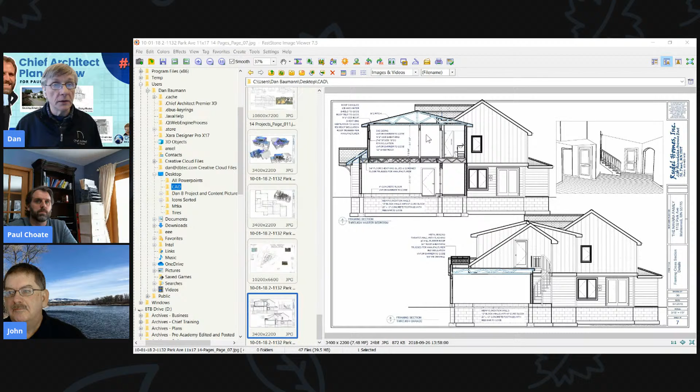I wanted to show you a little bit about some of the things we'll be covering in this course. Over the years I've developed a practice in Chief Architect, and Paul has adopted a lot of this into his plans. That's why I was really impressed with what he had done with nice details and doing the 3D framing in his project—taking full advantage of the Chief Architect software to draw details and show the framing for the projects you're going to do. I understand a lot of people may not want to do that, they may not want to show the framing, they'll just rely on the construction details. But Chief is really, really good at doing the framing after you've done a good model.

Up until now, we've really focused heavily on doing good models in the program, trying to get the right floors in, the right walls, the right ceilings, everything—trying to get all that stuff just right in our plans and have it as accurate as possible. So if we're doing that, why not show the 3D framing?

Because the framing doesn't take that long to put in. Paul, on your project, did it take that long to put the framing in once you had the model in place? We'll talk about that in a second.

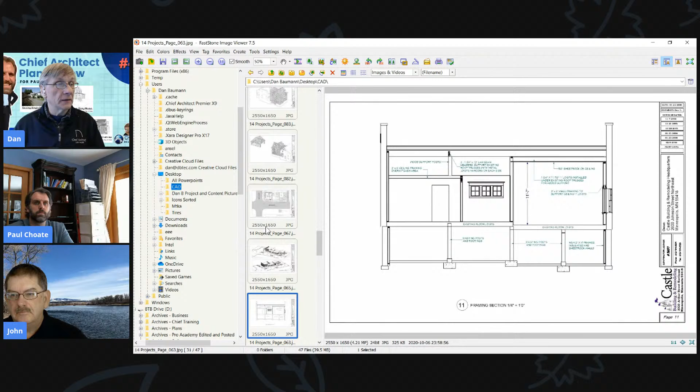I actually did this plan back in 2002, so I've been doing this kind of thing for a long time, showing that kind of information. Here we've got one showing the streets and everything in the plan, and even bringing that to the 3D views so you can really see what's going on.

So John, you've been around me long enough, and I know you do a lot of this yourself. You got any comments about the course? From what I've seen from people that show me stuff, Chief can do anything that AutoCAD can do, when it comes to residential construction. In our world, absolutely.

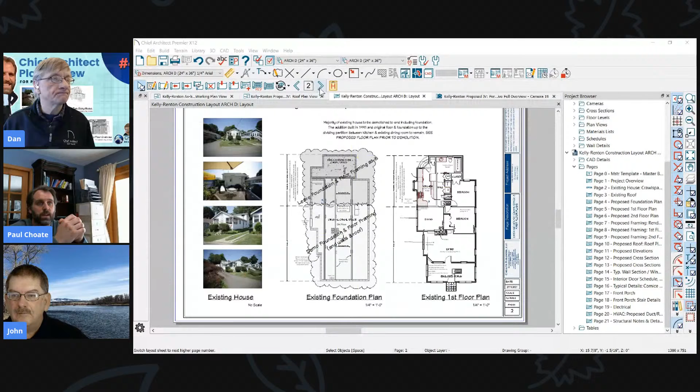So we're just going to tear half of the house down and rebuild it. So then I had to do my as-built, draw it up as best I could with the existing. It was one of those houses where none of the walls were standard dimensions. Some of them were 1.5 inches thick, just 2x4s with pieces of plywood put on.

The footings and the pillars and whatnot in the basement, there's a ton of them. When I went to do the as-built, I just kind of put layouts approximate of those footings, because I know we're going to tear half of it out. The existing structure has the whole first floor as an oak floor, over 2x6 framing with no subfloor, and we got to tie into that.

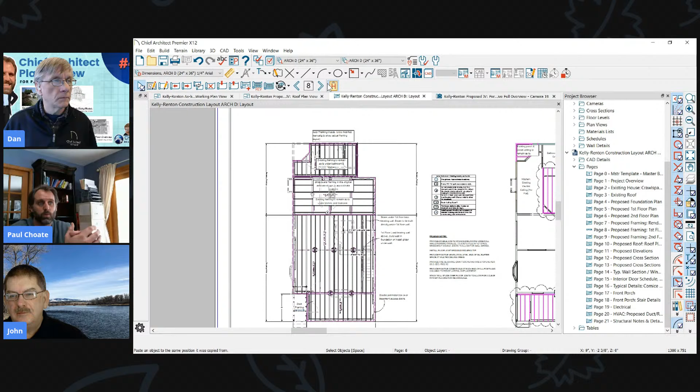The 1991 addition that was put on the back of the house—after that is where the original house begins, and we're going to keep about 10 feet of that original house. So if you look at my elevation views, the cross sections, you see the different heights of the basement floor, what we're going to have. It was a challenge for me to draw this, to get a good rendering or a good concept of what it's going to be.

Yeah, definitely a challenging project. I mean, it's not a huge project, but yeah, you got some things going on here. John, you were asking something? Nope. Oh, okay. So okay, cool.

So there's a couple of things I want to do here with you. One, you're up to 21 pages in your plan, and so you've got a lot of detail. You've obviously put a ton of effort into this plan. You started this in July, it looks like.

Is that correct? Yeah, we started—I worked on it for probably 2 months, and then we took a break because we knew we weren't going to be building it in the fall. We were going to have to wait until the spring. So once the concepts were complete, we just kind of took a break, and then I started working on them about a month ago to convert them over to the working drawings.

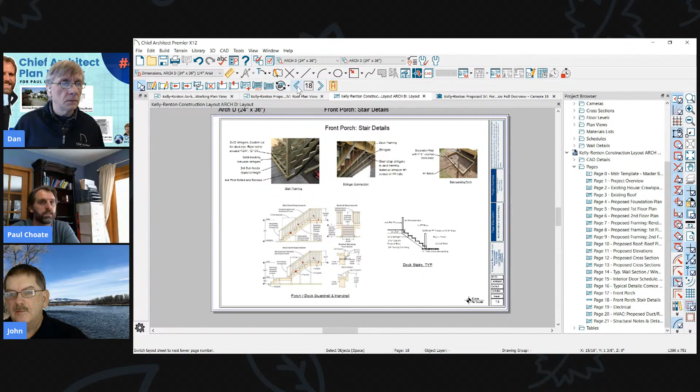Okay, cool. So, young couple, family, got kids and stuff? No, they're in their 60s. Oh, older couple. Okay, they just always wanted to have a bigger house, and so that's what they want to do.

Yeah, all right, cool. So I was actually looking—you had sent me a backup, and the backup has all the... so when you're in Chief Architect and you want to send a file to someone, the best way to do that is to go to the layout page, then go to file, and go to backup entire plan. What that does is anything that's on the layout, all of the plans, any pictures, any PDFs, anything that's in the plan, can be sent as a zip archive that will be put into a folder.

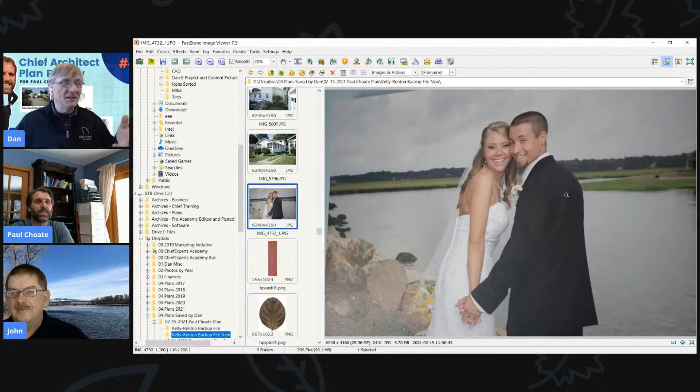And here you can see we got all the materials from the actual 3D house. The reason I mentioned, I asked if it was a young couple, is because I saw a picture here of a young couple—I thought, oh, maybe that's the people building. That's from another project, and I don't know—I took that and put it in a frame and put it on their wall when I drew it.

Yeah, and that's kind of fun. I'll do that too with clients. Yeah, if you can find—backup, save as. So yeah.

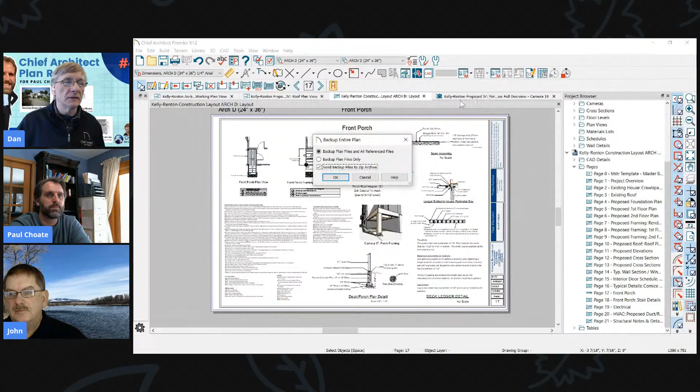And so when someone opens that plan on a different computer, they won't get those error messages that something's missing. So that's the best way to back up a plan and send it to someone.

So let's go to page 1 and start working our way through the plan. All I'm going to do is click on the page number here, type in which page I want to go to, and that'll jump me to page 1. I could also just double click on the item in the project browser where I'm in the pages for that layout. There's really a lot of ways to navigate through your project.

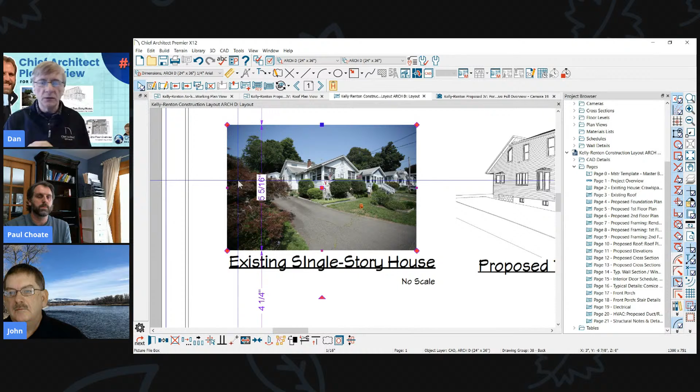I really like how you took advantage of the use of photos in your plan. You can put those on the layout, in your CAD detail window, or on your floor plan. There's all sorts of places you can store pictures in your plans.

Just an FYI about those: when you place pictures in your project, if you're going to work on this on different computers—a laptop, a desktop, maybe someone else in your company is working on it—when you put photos in your plan on a layout, make sure you open them and hit save in plan. Did I not save? Not on this one, it didn't. What would that be? You open it up on one computer, then you do it on another, and it's not there. Right, that's what happens.

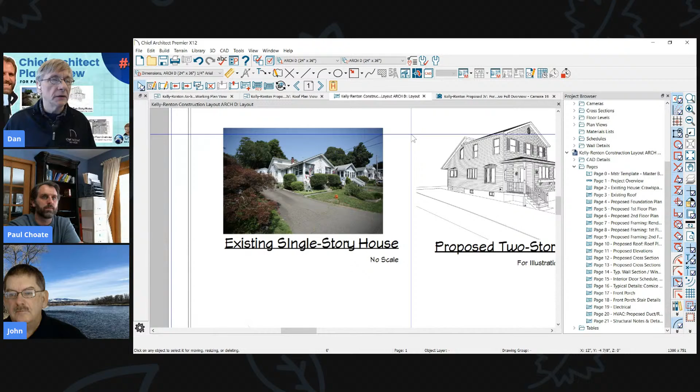Save in plan, okay. I see it because you did the full backup and it included those in that folder. But again, if you have any issues with those, that's what you've got to do.

So you've done a nice job, you've got some nice overviews here. Looks like you've done some nice renderings, got the shadows turned on. First and second floor overview. I like your little illustration, not to scale—that's a really good little deal there.

Now it looks like you're using one of my old templates, and you've customized it for yourself. So you're using the automatic page titling—whatever you name this, it's going to show up here, and it's also going to show up on the schedule, the page layout, the page schedule. So that really makes it easy.

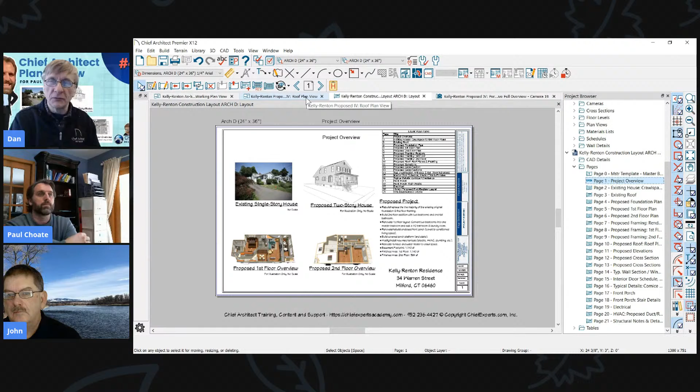So those of you using Chief's layout function, make sure that when you're adding things like that—again, part of this is we're reviewing your plan, but I'm also here to teach people about some of these functions in the program. So bear with me as I go through both of these types of things.

And if I get too deep into it, John, just tell me to shut up. I will. Or be quiet, you just say it nicely. Move on, Dan. Yeah, move on. There we go, it's like, get out of it.

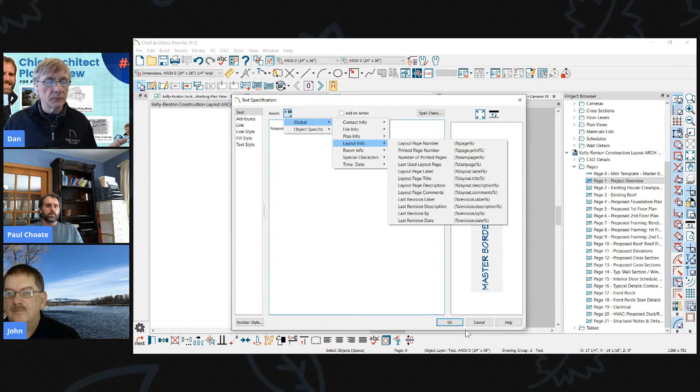Now, Paul, it looks like you might actually be using the auto page numbering, or are you not? So how are you doing your page numbering? Go to page 0, the full page. Okay, so you're using the layout page macro, which you can also do. In my new template, it has this all in it. And this works okay if you're going to rearrange the pages—they'll still update.

What doesn't work is I have no way to automatically label my callouts on the floor plan. So instead of using the page number, what we want to use is a macro called the layout page label.

It's the label. They could almost name this layout page number, because that's really almost all it's used for. When we use the layout page label, when you have callouts on your floor plan—let me find a callout, not a note.

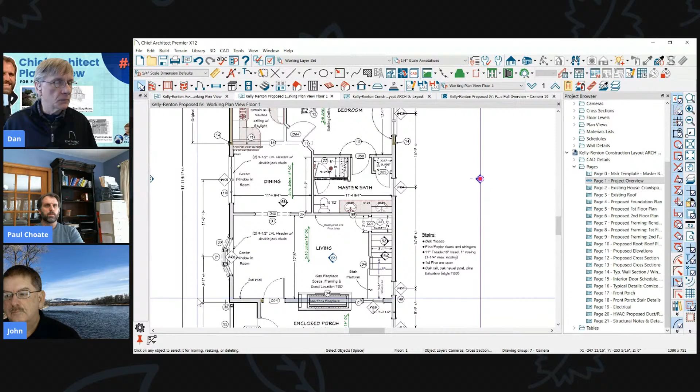Let's go back to your working plan. Here's a callout. If you want the page number to show up in there, under page display, whatever you have in that box where it says layout page, that first cell, it'll automatically put the page number in your callout. So when you rearrange your pages, they'll always stay up to date, and your callouts will always have the right page number on them.

I won't get any deeper into that right now, that's something we can talk about another time. Back to your plan. The step you're missing is that you have to watch your callouts and always change the page numbers manually, which is a real pain. So we want that to be automatic.

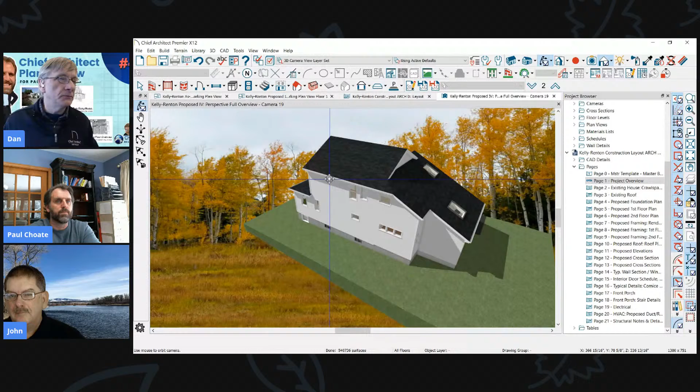Back to your plan, back to your layout. So you've got your automatic layout page table, which is going to be exactly what you've typed here. That's really cool. And if you rearrange the pages here, that will stay up to date. You can do different page numbering, but we won't get into that right now.

You've got some notes on your proposed project, which is always helpful. You've got your page description, the project address, and a little disclaimer here, always a good idea: these views are not to scale.

Made that up myself. Very good—probably that's where I got the idea to put it in my template. I think that might be, or did you take mine? Anyway, I took John's too.

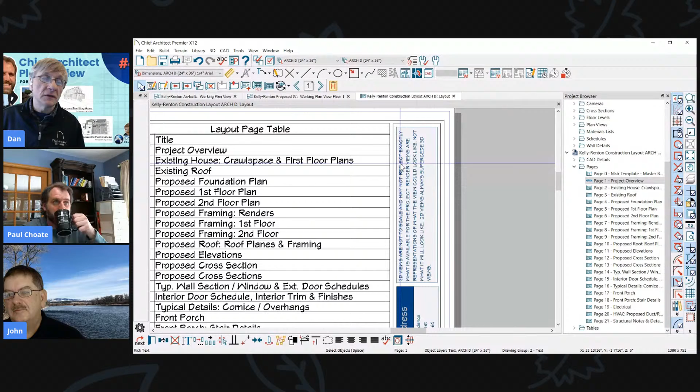So I put that on all of my plans. It's a little disclaimer on the sheet. I've heard horror stories of people whose 3D render views have been used against them to force changes to the project because the project didn't match the views. So we've got to make it clear to clients that it's just for illustration.

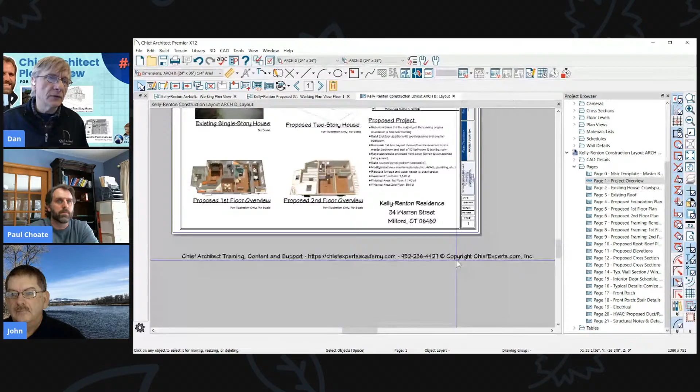And I like what you've done here under the views. I would recommend that—that's my copyright. Do you have a copyright on your plans? I do not. Yeah, I would recommend you do that. It doesn't have to be anything major.

Let me just open up a quick layout. If you do it, at least you've got something to fall back on, and it gives people pause. It's just a simple step: your company name, all rights reserved, duplication, distribution of plans without written permission is a no-no. It can be as simple as that.

You've just put your copyright on there. I would recommend doing it in small letters somewhere on every page of your plan. And there are some—if you look in Chief's library, if we go back to the library here—oh, my toolbar messed up again.

If we go here, and we go to CAD blocks, notes and legends—I've been noticing that Chief has been adding some nice things in their notes here, where you can just grab parts or all of these things and add them to your plan. So that's not a bad idea to take a look at this.

If I were drawing these plans for somebody else to build, I would have a lot more notes and disclaimers in there. But since I'm going to be building this, if I say the contractor shall be responsible for this, well, I'm the contractor. That's a really good point—I've seen plans that have pages and pages of notes.

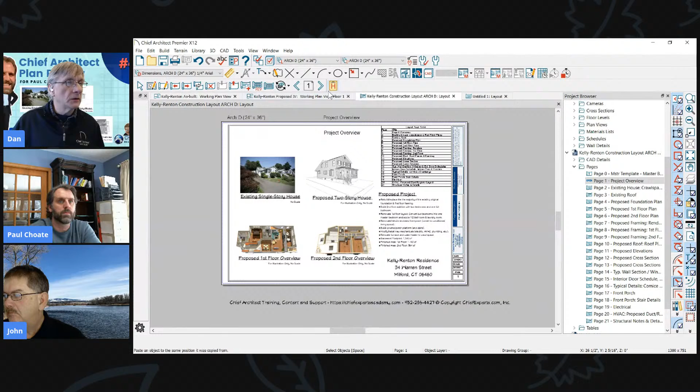All right, so if we go to page 2, you've done a really nice job here of showing the existing building, and you're very clearly stating that that's going to stay the same. This part of the building is going to remain, that goofy addition on the back. I see, it's probably a nice addition, it's just the roof that's a little goofy. And you're going to demo the foundation and floor and everything on this one. So you're really demoing it all, down to the ground. You're not saving anything. So you're starting all over there.

Okay, so I like how you did the clouding and then the label there.

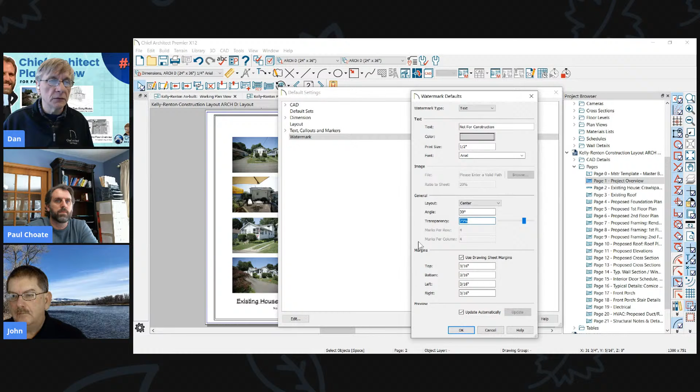Another thing you might do when you start letting these plans out to people is you could do the watermark. I think a lot of people don't realize Chief has a watermark function. If we go to the default settings, you can click on the watermark function and type in a text, or you could have an image in it, and the text could say whatever you want, like 'not for construction' or 'don't mess with my plans,' whatever you want to put in there. I like to give it a real light gray so it's kind of subtle in the background, with a bit of an angle, 30, 40 degrees, and some transparency. You can play with that a little, then click OK, and then we turn that on. So that's how we set it in the defaults, and we turn it on under the view watermark.

And where is it? Oh, is the text too small? Let me go double check that. Watermark... print size only half an inch, so you might want to make it a little bigger. Let me make it darker so it shows up. Oh, there it is, so I needed to make the text bigger. I'd even make it bigger than that.

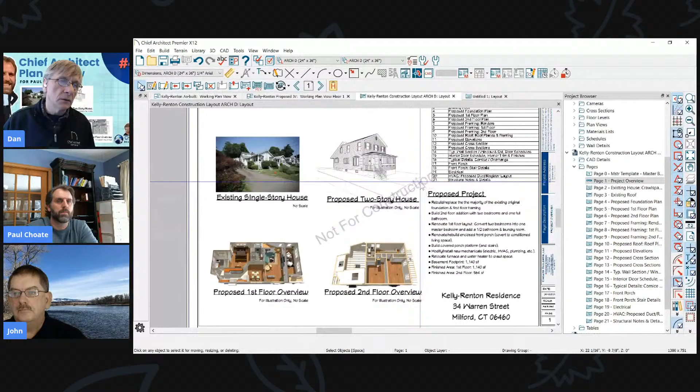So go into your defaults again, let's change that size to 2 inches, and click OK. Done. It's not showing up there, but here you can see it well. So it's distracting a little bit, but it's very clear this plan isn't done. I've heard horror stories of people where contract designers worked on plans, they weren't done, and the homeowner took the plans and did the project anyway. Since the plans weren't done, the project was a mess, and who was responsible for that? It came back to the designer. So it's not a bad idea to use a watermark on there when you print those out.

And the other thing that's good, if the client owes you money for the plans, they can't do anything with this until they pay you. They're not going to be able to get a permit with this. So that's a way to protect yourself. You can make it fill the whole page, make the text a little taller, whatever you want with that. It doesn't protect you from them taking it and copying over it and doing that stuff, though.

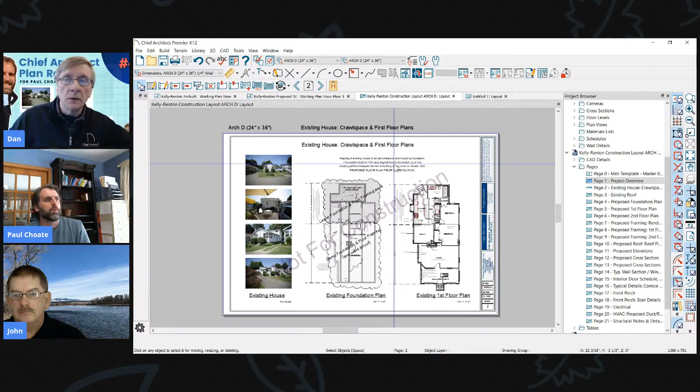So tell me a little bit about how you went about getting this job. Well, the people called me. I forget exactly how they came across my name, whether they saw an advertisement or it was a referral. It might have been a Facebook thing where somebody recommended me to them. I'll have to ask them, they did tell me, I forgot. But anyway, they called me, I went out there and they told me what they wanted. I took a look around the house, listened to everything they told me, and first tried to figure out if it was feasible to do what they wanted, not even thinking about price. I looked at it and said, yeah, we can do what you want to do. Then we talked about their budget, which was about $150,000, and I said it's probably going to be about $300,000.

We kind of looked at each other, like, okay, we were just throwing something out there. We weren't really sure. And then at that point I told them what I can do for them and how I go about the design process, that I would come out, draw the house up, do the as-built, and then from there I'd start drawing a concept plan.

And as I'm drawing the plan and coming up with ideas, I would email them some of the ideas to make sure we're on the same page. I explained to them how I work, and I charge a fee for that. On this project, I charged them for the concept plans, $5,000 for the concept.

And did they pay that all up front? They paid half up front and then half when I was finished.

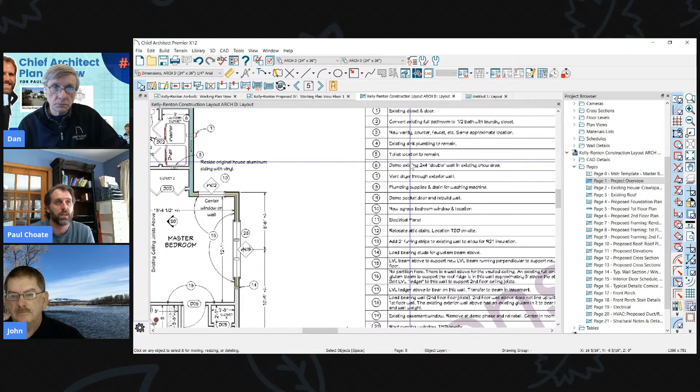So between the lumber prices increasing dramatically and the added expense to haul away all the excess fill from the excavation and pour more concrete, and now we're down to footing drains, getting drainage, a dry well, things like that, it brought the price up to right around 400,000. Either right under or right at, or right over - it's like 402 or 398, something like that.

And I'm sure that will change as we go through the project as well.

Yeah, I remember when I did remodeling, I had a little form that people would sign that had the 20 things that are going to go wrong with your project. It was really cool. We're going to hang plastic everywhere, but you're still going to get dust. Some of our subs aren't going to show up when they're supposed to, but don't worry, we'll take care of it. We're going to get a wrong delivery - we'll take care of it. That's why you hired us.

So that was also part of it - plan on spending another 10% by the time we're done, because there's going to be changes, unforeseen things like that. So budget for that.

So we jumped the gun and started converting these into construction drawings before I have the construction contract signed. I'm not real concerned about it. But when I do the construction project, we changed windows - the type, the size, the style.

And I'm going to re-input all my lumber prices again, and it is what it's going to come out to. Maybe it will come out to less. Probably won't.

But I will go through the pricing one more time when I draw up the contract.

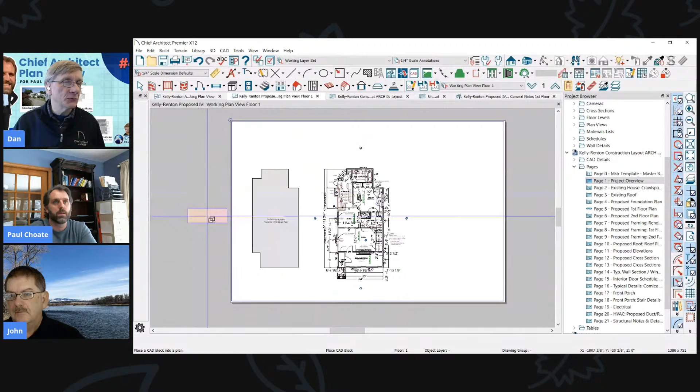I like how you're taking advantage of the text schedule. And I see you put that in a detail window. So details in this, when you're on your plan, and I get confused. I opened your plan and it came up like this because you have the page turned on here, and that always confuses me, so I'm gonna turn that off. You thought it was the layout for a second. Yeah, I did. So I never work with that on the plan view. I like it on, I don't know why, I just do. It's up, whatever you like.

So you have in your CAD details, that's this right here, where you can store all these things that are in your plan, CAD Detail Management. So you've got a lot of stuff going on in here. You've done a really nice job of naming all of those things too. The advantage of doing this is that, imagine if you had all those in separate plan files, what a mess that would be trying to find all of those things all the time. And then if you did anything to your layout, you'd lose all your links. If you renamed your plan, it could be a real mess. So this is where you do all of that information.

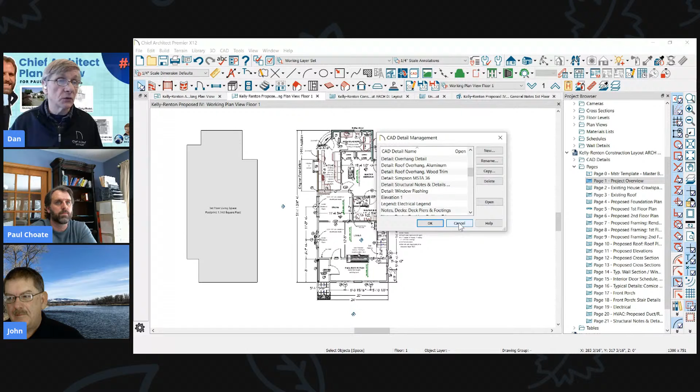So you got those notes in one thing. So again, if I want to look at the deck, there it is. And that's really the ideal way to do it. That's what these CAD detail windows are for. You can store schedules in those. You got your note schedules in one of them. I have some people that store all their schedules in one of those, they store all their notes in another one, and they'll just grab what they need for their layout when they need it. So one of the things people might ask, well, I'm looking at my note list here and I go, oh, I need to change something here.

Just an FYI, when you do that, Chief does offer you this down here where you can search to find where that is in your plan when you click on an item on the schedule. And this is true for all schedules, by the way, not just note schedules. Also, you could, if you just want to edit it here, hit the little open dialog icon for that item on the schedule, and that would allow you to edit that item. So if you want to find it in your plan, you click on this magnifying glass and it'll take you to your plan. And there it is, that's that note right there. So you don't have to go hunting, where did I put that note? It's just a real nice way to find it. And again, that's true for all schedules. So if you have a window schedule and you click on a window and hit the search function, it'll go highlight the windows that are related to that item on the schedule.

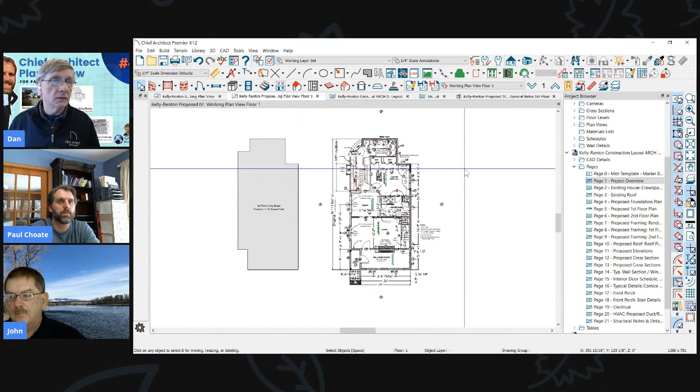So Chief is doing phenomenally cool things with the schedules. And the next version, same thing, more cool things for the schedules are coming. They're really making them super powerful and super usable.

All right, back to your plan. John, you got anything you want to add at this point? Well, I'm just thinking at some point here we should probably go to the questions.

Oh, okay, well what do we got? Questions and comments, pop some in there. Oh, I see you did a wall schedule. Before I do that, before I talk over you John, I wanted to finish this page.

We got the wall schedule too, and you've done that by just creating a simple schedule that shows the walls, different walls you've used in your plan. Is that right? Yeah, and a nice way to do it, it's really descriptive. So you create a wall, that's the name of the wall right there, right? And then you just added that to the schedule, very simple. So if you add more walls, this will update automatically. If you change the names, it'll update automatically. So very nice, very nice.

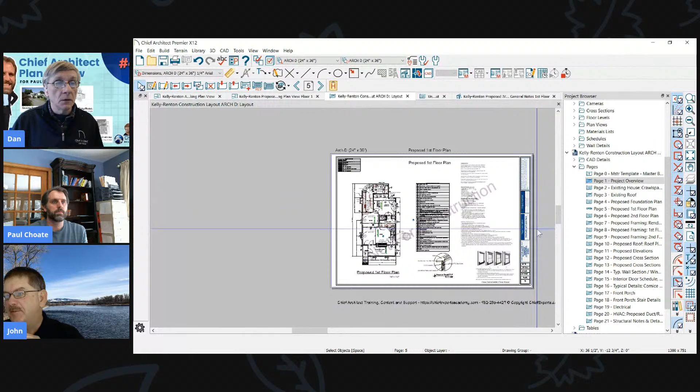I'm sorry John, go ahead. Anyway, Bill asked a question we knew would be asked: how many hours are in the project so far? I think you've got what, a couple days worth of work in here?

Is that what it was? A couple of weeks. There's probably 200 hours between the plan and the layout.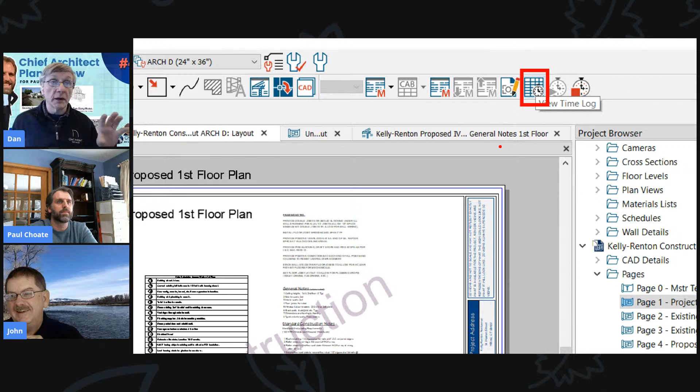So when you're working on a plan in Chief Architect, Chief is watching you in the background. It's not watching you, it's keeping track of when you're physically working on the plan. So it's got a time tracker in there. You don't have to do anything. Every time you start a plan, it's going to start recording the time when you're working on it.

If you go away for 5 minutes, the clock will stop. And then when you pick up your mouse again and start working on the plan, the clock will start again. So Paul has, we got 70 hours on the layout page by itself.

And then we've got, and again, we were looking at that earlier, and there was like an 11-hour block there. I don't know what the heck that was about, but it was there. 70 hours though in the layout, if you have the plan open at the same time while you're pulling stuff into it.

That's what it is, covering hours. Yeah, I often have them both open at the same time. I like to do the layout and the plan as I go. So here in your as-built and the plan, because the as-built, you did that and then you made

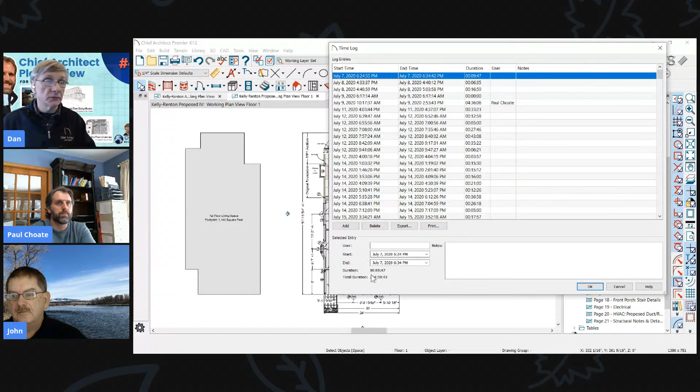a copy of it to start making the changes. So this is going to include the as-built plus the plan. You got over about 200 hours. That sounds about right, which for this plan, that's very good.

And you also commented that you were learning a lot about Chief as you're doing this too. Yeah, exactly, because I don't do Chief every day. I mean, I have for the last several weeks now, but I like to get the auto functions to work really well so I don't have to do anything manually.

And a lot of times, I'm still working on something now, trying to get a cantilever to frame the way I want it to, and it's not doing it. So I'm going to exhaust myself trying to get it, and it's going to take hours, and it will look like it's adding hours to the design, but it's really not.

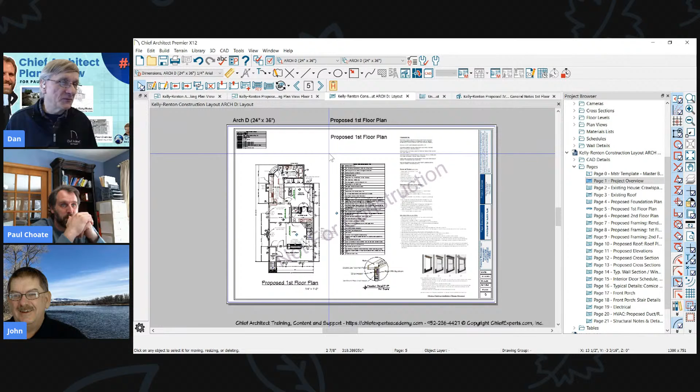So if you came to my CAD class, I'll show you how to do that in about 5 minutes. So that's why I don't really charge by the hour when it comes to plans. I charge what they should take me, not what they do take me.

Yeah, that's kind of subjective. We could argue that, but anyway, let's not. All right, any other quick questions? It's on 24 by 36 paper. That was a question. Are there any Chief Architect templates for typical construction drawing layouts?

Just show them the library where that stuff's at, quick. Yeah, and construction notes, legends, and schedules. Yeah, there's some of that.

If you want to go look at examples, go to the Chief website and look at samples. A lot of people upload samples there. That's a good way to do it.

Again, I have my template, which has all that stuff set up already, and it's ready to go. I don't have anything on the things. They're blank to start with because I want you to set up the way you work. And getting these notes the way you work, you're going to need a little upfront work. So that's just what you have to do.

Now, the next time, Paul, you do this plan, you've got a lot of your notes in place already. Yeah, it's my template. So you could start adding these to the library or add them to a CAD detail window as part of your template, and it's there and ready to go.

There's a question about wondering what Paul's background is: general contractor, architect, designer. General contractor. I don't have any formal training in being a designer, but I've been doing it for 25 years. So I have a design-build company. I wish I did take some formal training, it probably would have saved me a lot of time, so my projects might come out a little bit better.

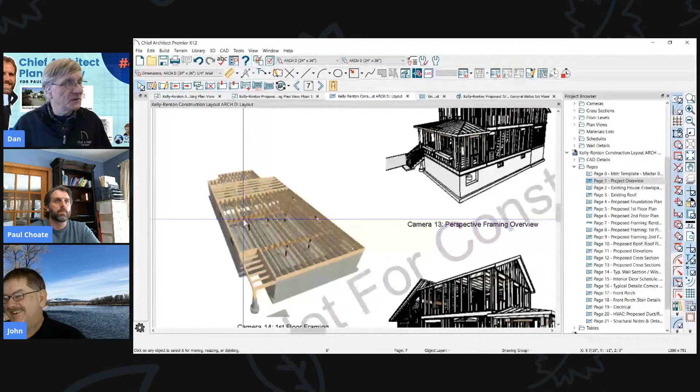Now these views that you have here, thank you. I'm glad I have you here, John. So these kind of views on the layout again, they look really fuzzy, and that's normal.

Now this kind of view, Paul, you have the option that you're just showing that as an image, but you do have the option, you can update that, that's updatable. You can show it, or you could show it as a line drawing too, and you don't have to resend it to the layout.

I run into this a lot with clients. People will send these kind of views to the layout, and they'll send them as an image, not as a live image, but it's not a line drawing. So it'll probably still print fine, but a lot of times you want to do plot lines on that.

So that'll be a line drawing now. On the layout, you can just open the dialog and switch that to plot lines. And then sometimes in a lot of my framing plans, I'd rather print the plot lines, so I hit the refresh button, and now it's going to print as a line drawing, and those will print perfectly straight when they print. They just show on the screen a little jaggedy.

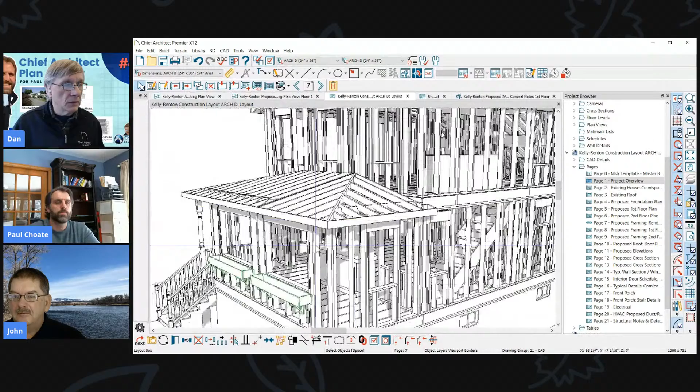And then I would normally turn the shadows off on this kind of view too. So all on your CAD, on those drawings, are the CAD lines dashed? The CAD lines, are they dashed? Those are vector lines, they're not. If you open that view up, are they dashed CAD lines? No, that would be a layer control thing if it were dashed.

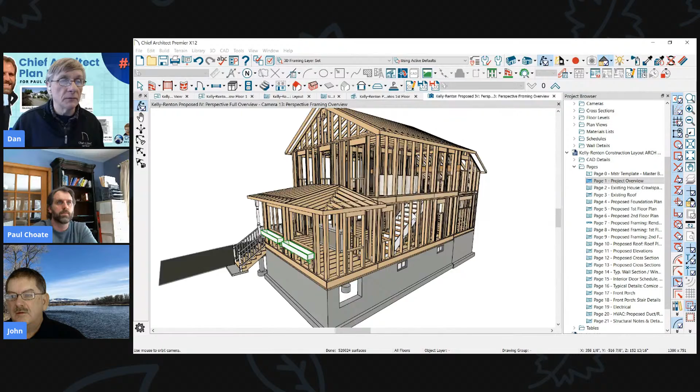Just wondering why they're... So we would switch to a vector view here, and then we could go to the view defaults and turn the shadows off. I've found that sometimes on these framing plans, the shadows add a level of confusion to the view that you don't want. So again, doing it as an image is fine if it's printing fine, but sometimes they print too dark, sometimes they just are not quite right. So now when I refresh this display again, it'll show without the shadows because I went into the view and turned it off. That'll print really nice and clean now.

So anyway, that's just an FYI for you, and you probably already knew that, but again, good information. I had asked earlier why you'd show the framing on that existing part of the house, since that's existing. Why wouldn't you just show the framing on the new part? It's for reference, for illustration, to show what the whole thing might look like. But I suppose you're right, since we're not going to be framing that.

Let me take a moment and show the client and everybody on the call the basic concept of what I'm talking about. Let me open a new plan here real quick and do this super quick.

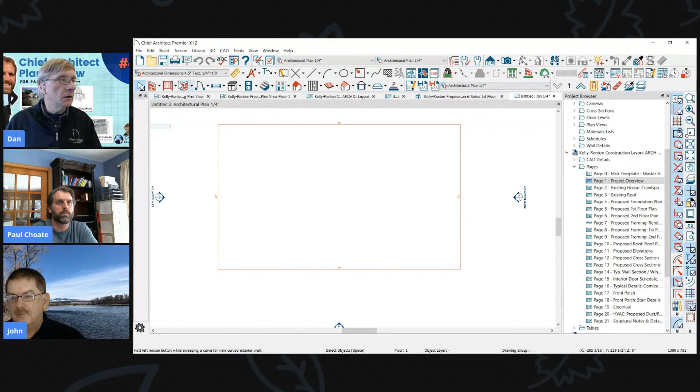I'm going to draw a box that's going to be the existing, and then put a little room addition down here. I'll use the same wall type, and I'll put a roof on this plan. I want to show the framing for the new plan and not the existing house.

So all I have to do is click on this. Actually, I do need to do a foundation real quick too. So we've got to show foundation, build the foundation. Build foundation, I'll just click through this real quick.

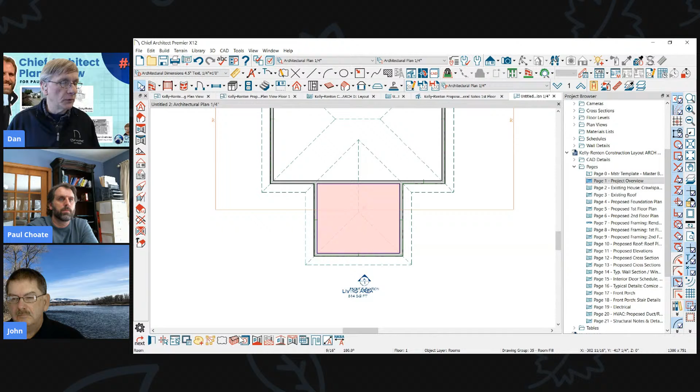Okay, now pull this in here. Then when I go up to the room up above, I can click on that room and open the framing, or I can do the framing just for that room by clicking on this button, this framing icon.

I'd say yes to this. I don't want it to frame the whole thing, I just want it to end where that wall ends. Then I'll say no to that because I'm not in my framing view, so let me switch to my framing view. Then when I go to the foundation, there's my floor framing, and again it's going to be I-joist because that's what's specified by default.

Here I would click on this and put those walls on a different layer called walls, normal, new. Click OK, click OK. Then I would frame those walls separate from the rest of the house.

Then I do the same to the roof planes. I'd open the dialog for the roof planes, put them on a new layer called roof planes new - this is all set up in my template - and then frame the roof planes. Again, if I'm doing hand framing, that's done.

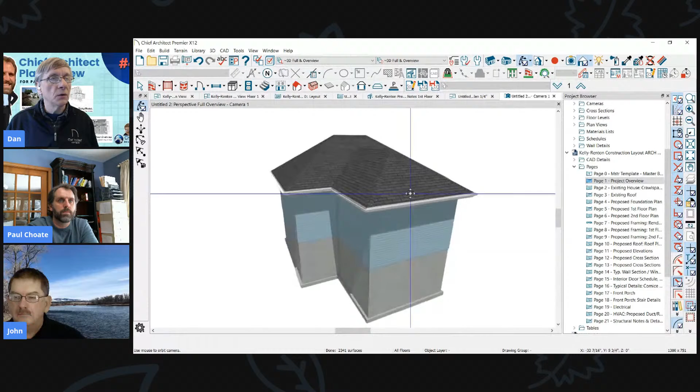So now when I bring up a 3D view and switch to the view that shows as-built versus new 3D framing, because I put the walls on a layer, that layer's shut off, but the framing still shows. Because I put the roof on a layer, that roof framing still shows.

So there we go. So you've just added about 10 hours to my layout and plan. What do you mean? We were talking about how much time I have into the drawing. Now I have to do this. Just do it on the next project, Paul. My Friday night is shot. Thank you, sorry, anyway, that's cool.

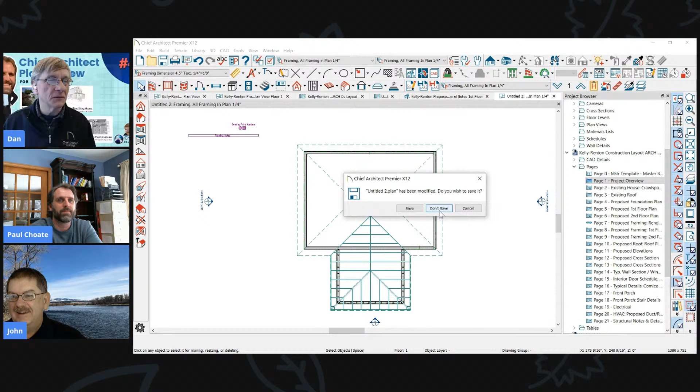That's all right, so it's... but I haven't gotten there yet. But yeah, now, I mean, you've done a phenomenal job on your plan, so don't take that wrong. It's just I've been doing this a long time, and I've mastered those steps the way I like to show it, and it really works well.

All right, let's just get back to your plan. Any questions, John, that we need to answer? Comments?

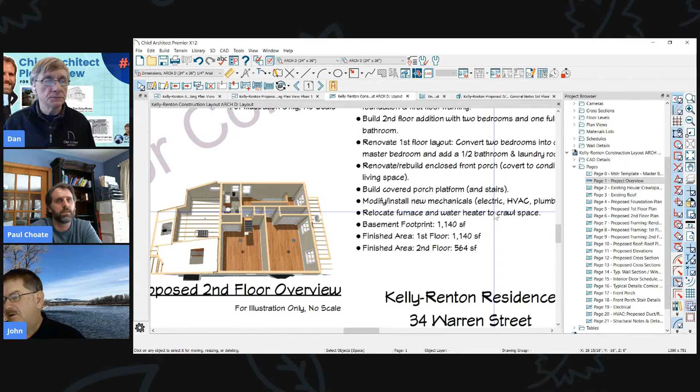How many total square feet are there going to be when it's done? It's on page 1, I believe. Is it on page 1? Let's go back to page 1. Did you have a note? Yeah, here you go - basement finished area, finished area. So about almost 3,000, 2,800... around 26, 2,700, okay, I think, 28. Yeah, it's going to be a lot of house when you're all done.

It is, it's a nice layout. We're not going to talk about the actual layout, but yeah, it's nice, just the bit I've glanced at. There's only so much I can do with the existing footprint and the size of the lot. So exactly.

So I'm wondering, I think Margaret asked this question after we talked about it, but why is the cloud around the existing foundation on page 2? Just to note that that's the existing foundation.

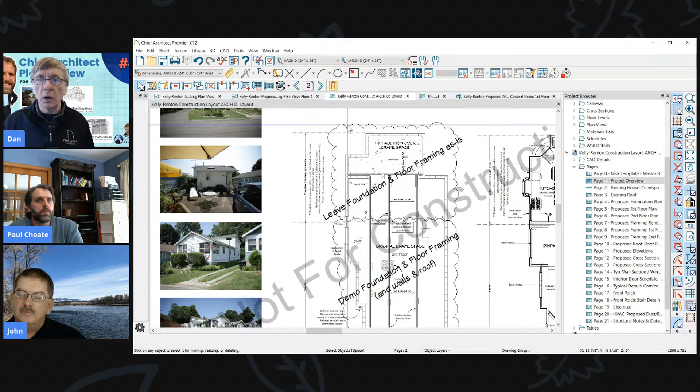Clouds are really a nice way to bring someone's attention to something, and I like how you've shaded this cloud so it's really obvious. The trouble is when you print in black and white, the light gray shading won't print, unless you're printing in shades of gray, then it will. So it depends on how you're printing your plan and who's doing it. It might print in gray, it might not.

So if you wanted that to really show, you might do a hatch pattern in that and spread the lines out, make it transparent. That's another way to do that. It just depends on where you take it to get printed. I know color prints can get really expensive, unless you have your own plotter.

All right, so you've done a nice job laying out your posts, your beams, lots of nice notes. I see you like to bend your lines. And I noticed on your post on Facebook the other day, so I think you picked up on that, so when you add text to your plan...

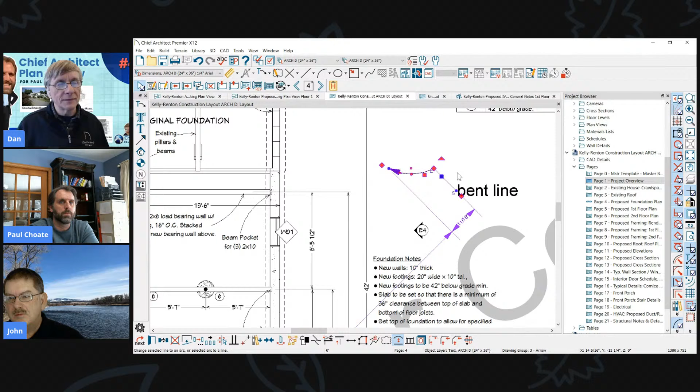We had talked about this, that you could take that line and make it an arc by clicking the convert to arc tool, and that will make that line an arc. We could do that, but that's a bit of work, so I don't like doing it like that.

The way I do my text when I want a bent line is I use the text tool. I draw one arrow, then click and add the text. My computer just decided to slow way down, I'll just throw some text in there. Then I grab that arrow with the right mouse button and my control key held down, and now I can put it wherever I want.

And then if I need to break that to go around things, I hit the 3 key or the break tool, and I'll put a break in that line. Then I'll grab this, hold my control key down, and I can bend it around like that. Did not know you could do that. You just learned something new.

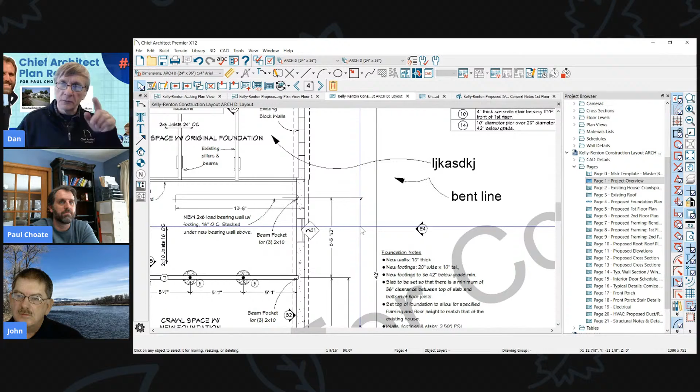Way to go. You can do that with walls too, Paul, when you get real creative and want things to cost a whole lot, since walls are made out of CAD lines. Driveways, roads, sidewalks, anything made out of a CAD line, you can bend them like that. All right, let's keep moving on.

So now this detail, you've drawn this with the 2D CAD tools. You didn't get that from the 3D model, correct? Right, yes. All right, cool. Yeah, nice looking detail, lots of notes. It says a lot of information.

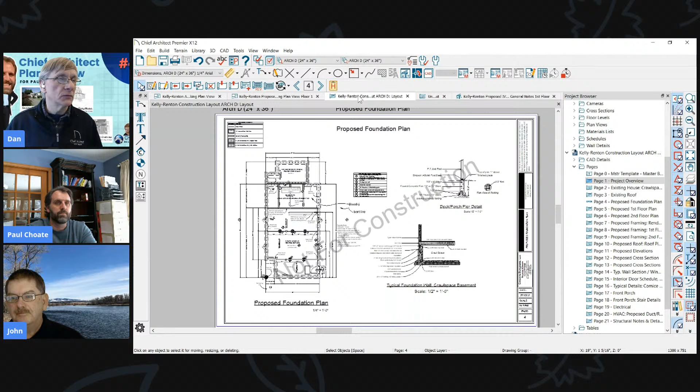These details take a lot of time to draw. Not just to draw, but to figure out. It's one thing to draw it, but now you got to think about how am I going to do this, and how am I going to build it. You try this and you try that, and what could take you 15 minutes to draw, if you knew exactly what you're drawing, could take hours to figure out and draw. So that's where some of the challenge comes in on a lot of this stuff.

All right, here's the page we're on with that nice schedule. You got a nice little detail of the overhang here, that's great, shows how the headers work. Got your wall schedule. You got what do we got here, a proposed second floor plan. Looks nice, that works well.

You're going to get your 3D framing plan, and we already talked about that. The framing you've added here is how you got those nice 3D framing plans. Because as you're building your model, you're getting the right floor thicknesses in, right wall heights, right wall thickness, right ceiling heights, right roof planes with the right thickness of roof box. When you add the framing to those boxes, it's all going to be the right kind of framing, and it makes it really easy to fill in the framing on these kind of plans.

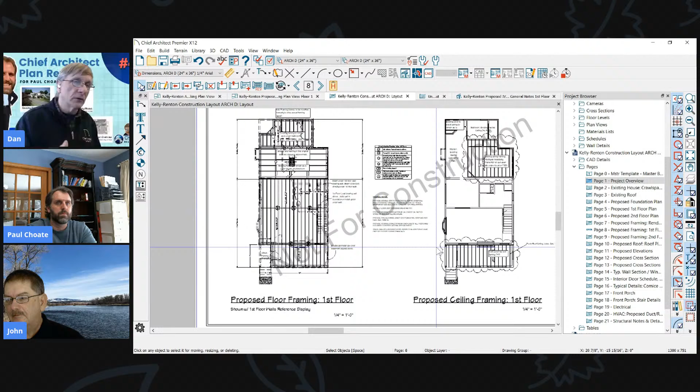So you've got something here, existing ceiling framing, modify as necessary. That's a TBD type of a deal. So you got a schedule notating your different kinds of call outs.

So it's another note schedule. How'd you get the different types of call outs on that schedule? Well, I have floor joist framing call outs, ceiling joists, and rafters.

So how'd you get the different shapes show up on the same schedule? In my defaults, when I set up the call outs for a particular plan view, it allows you to pick, and when I set up my note schedule, it allows me to pick a different shape if I want to.

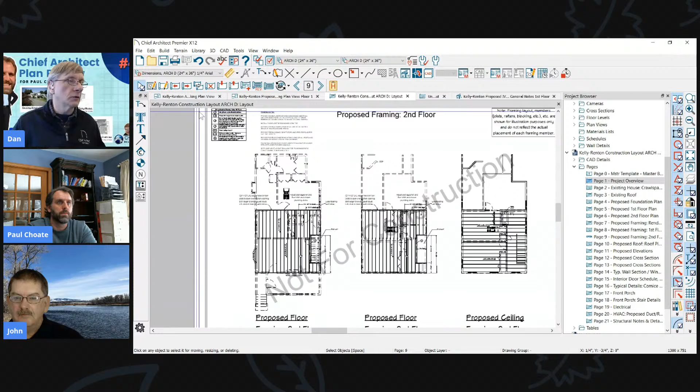Well, we'll come back to that, because you got that schedule here. So you've just combined a bunch of stuff into one schedule, basically. Yeah, okay. More framing. Nice detail there.

Notice there, that's the second floor. I think those are the proposed second floor, and I drew one with the first floor walls underneath the second floor joists. Okay, and then next to it is the reference display of the second floor walls.

Just to give, and again, it's probably not necessary, but I kind of do it for myself because I know I'm going to be on the job site during this, and questions will come up, and it's just a real easy way to see what's under.

Yeah, you've figured it out in advance. Yeah, so you know how to order the right material. You know how you're going to put it in. You won't have any waste. You'll have fewer mistakes. I mean, the time spent on these kinds of things can pay back immensely in the course of the project. Yeah, immensely. So, but yeah, no, these are awesome.

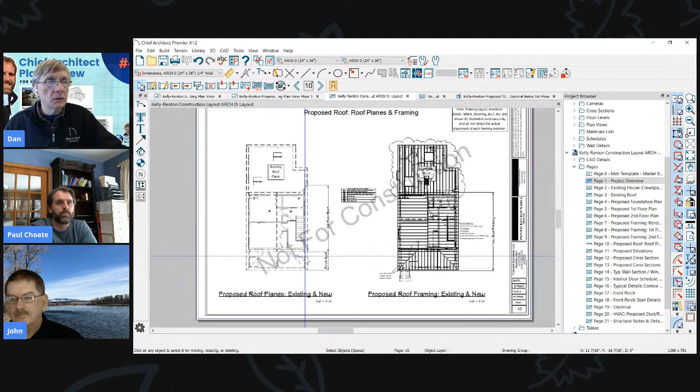Got some nice elevations. You've done the story pole here, which was nice. That's the standard story pole that Chief has. I know the inspectors like to see that, so I just threw it on there. I don't think I'll really need it for anything, but they want to see the total height of the building.

Yeah, I tend to do these dimension types of things in a cross section. That's just how I've always worked. But Chief has since added the story pole option, which I know a lot of people use, and it works great. Again, another one of those kind of views that's an image that might print better if you convert it to a plot line, to vector lines.

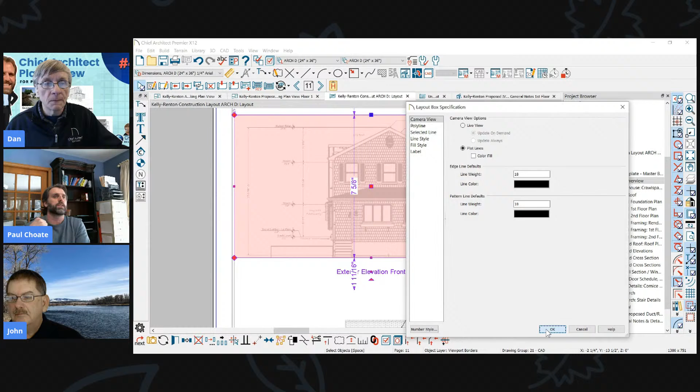And you know, I don't do it as an image because I change it so much, I make so many changes. When I say image, Paul, I mean you sent it to the layout as a render view.

So the difference between a render view and a vector view, and I call a vector view a line drawing, is the lines on the line drawing are going to print to scale. They're going to print accurately. They'll have the different line weights to them that you would use, the different line colors if you had them set up that way. And so when we see this view here, which is now a vector view, that's going to print, I think, really nicely along with this kind of an elevation. So I always do my elevations in a vector view.

So again, this was sent to the sheet the same way you sent these kind of views. You sent a render view, it just happens to be a flat on render view. So that's all I'm really trying to point out here. So they'll both probably print fine, but this one will print more accurately.

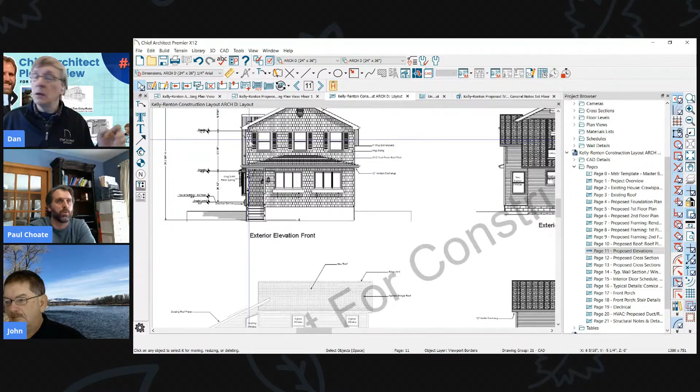That will update if I change a window. Bam, yep. Plus you can go in here, and if you have some extra lines that you want to get rid of, like all those rafters, you could hit this edit icon here, and I could hold my shift key down and delete all those out of there. I need to go turn the shadows off to get rid of that though, because the shadows are still showing up there.

I can't edit that, but I can now edit any of the lines on this view with that. So what I'm doing is I'm editing the 3D camera lines, the lines generated by the 3D model. As soon as you update this view again though, with the update, those lines will all come back. So that'd be the kind of thing you'd save till the very end, until you're ready to print your plan.

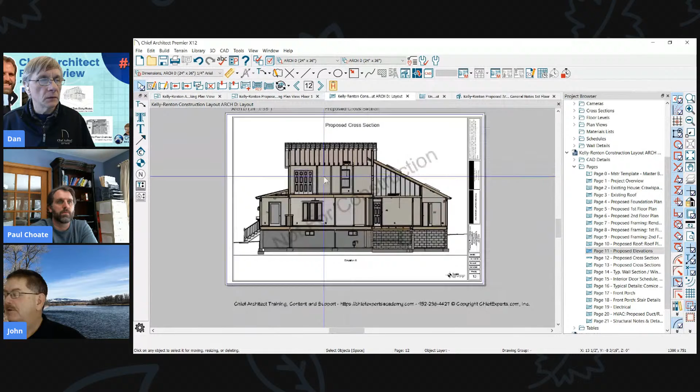Oh man, we're out of time. Yeah, questions still? Do you want to take some time to answer? I'll take a few questions. Yeah, we can run over a little bit today. We can just say yes or no and go over them another time. Yeah.

Where I lost my place—I'll just start at the bottom. Can you use previous CAD drawings as long as you've saved them for access?

You can import them from any DWG file. Anything you've drawn with Chief can become a CAD detail. So all you have to do to create a detail you can reuse over and over is go to where you've drawn that detail. Let me go find that here real quick and open it.

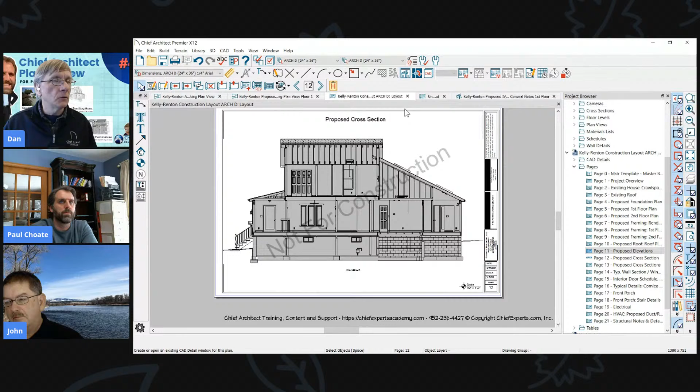Oh, I'm on the wrong plan here. Let me just open one of these details.

So I could group select this—I'm just highlighting everything. I'm going to make it a block right here by clicking the block icon. Then I'll open the dialog for it and name that detail right here—this is a section, number 1,2,3. Then I'd click OK.

Now I could hit this book icon and add it to a library—that'd be in my user library. Since I changed the name, it added it and put it there, and I could now put that in different folders in my library. Anytime I need it, I just click on it and bring it back in. I can click on it, ungroup it, and now I'm back to a detail I can edit. So it's really a powerful way to save and store the information you put into your plan.

Next, John—how does somebody add a schedule to a CAD detail? A schedule in Chief is created from the schedules right here. So we have all these different kinds of schedules.

Wherever your detail is, if you have a detail here and you want to add a schedule to it, you would have to add one—in this case, a note schedule. Then I could just add notes here and the schedule would start populating.

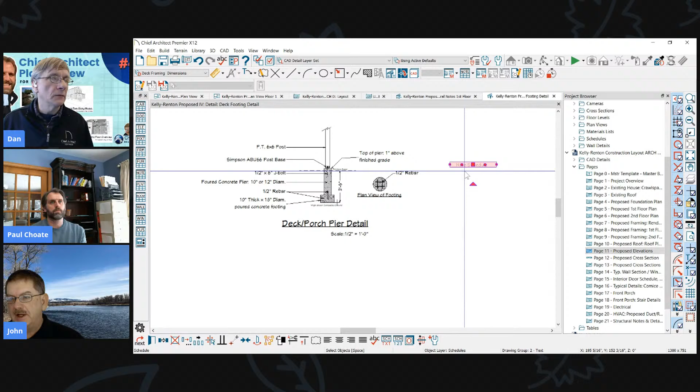So I'd have to make some settings for the right kind of notes—use a note number for each item that has text for it, and have it right in the schedule.

I'm going to miss a few here, but Paul, a few people have said you're amazing work. Good job, it was a nice job. Yeah, you've done a really great job.

We didn't even get a chance to really dig through all these other things, but you got some nice 3D sections here—these are cut through your 3D model because you've done everything accurately in your model. That becomes tough to do. It takes time to get that all right.

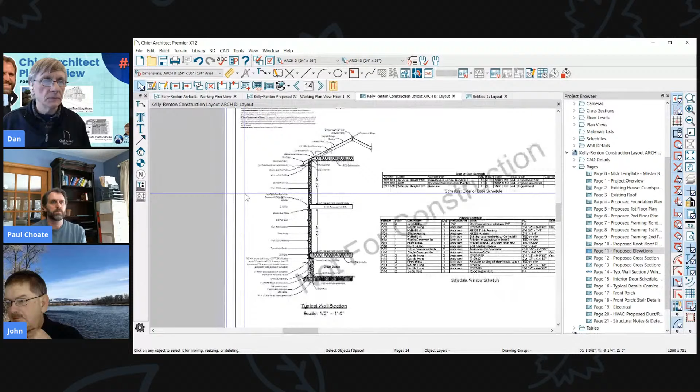And then you got some more schedules. You got a really nice section detailed out like crazy, which is awesome because—how are you going to build this thing? That's the kind of question a good designer is going to answer all day long. You just need to figure that out before you go build the project. Good plan, it's well needed.

So some more sections—I think you mentioned you were adding some more sections here or something. And again, I like the little details you've done on these pages, showing how your deck's going to be put together and how you're doing the footing. You've got some nice pictures.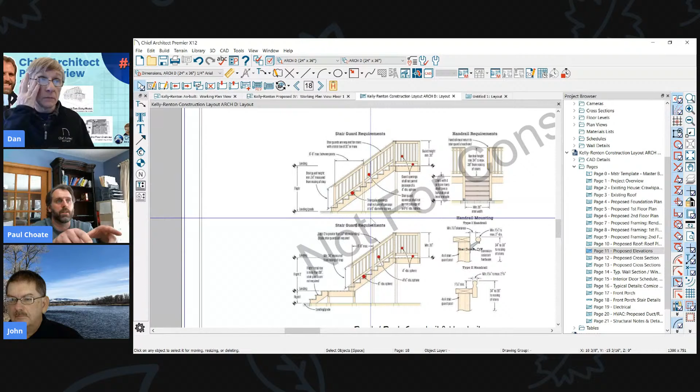So is this something you put together? No, I took that—if you double click that to go to the CAD detail page, that's just a picture, a standard stair picture. But those are actually pictures of projects I built, and I figured the best way to show my framers how I wanted to build is, bam.

Because to draw that detail would take a while. Exactly, I'm not going to spend the time doing that. Yeah, so you're obviously using the plastic decking, the Trex or whatever it is, so you have to have a lot of 12 inches on center for that kind of stuff. And I like how you strap them together here.

I mean, that's not going to go anywhere for a long time. So that's a nice detail.

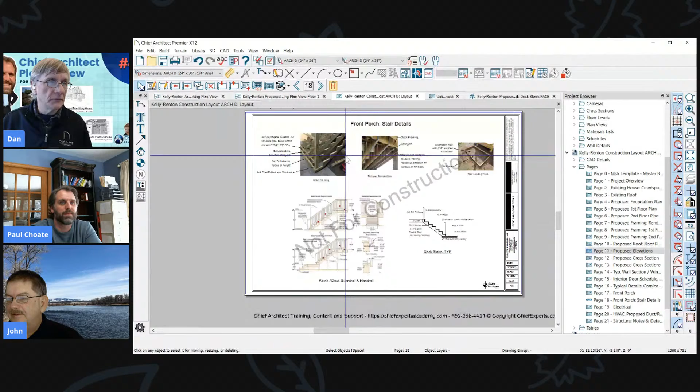Very cool. So that's your viewport right here, holding what you've drawn in your plan. Again, you never draw on the layout page. In this case, you've added notes in the CAD detail window, where it should be done. That stays as part of your plan, and you can find that detail again easily. Nice job not drawing on the layout page. I try to really limit what I draw on the layout. Borders and text, borders and labels is what I tell everybody. Labels here and there.

And then you got your electrical plan. Very nice, you got a nice electrical schedule. Did you grab that out of the library? Right out of Chief's library. I'm probably going to make my own, but for now I just leave that in there. The nice thing about what they've done here is it matches the symbols we're using from the standard libraries, so that works really nice. Again, that's in the library, and here's what you're going to get.

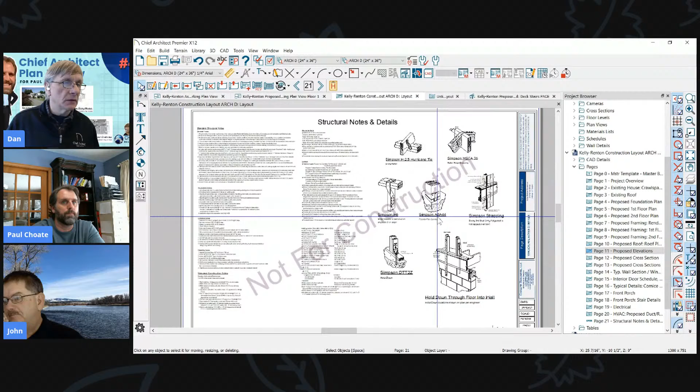It looks like you're going to be working on your ductwork and things - get that in there. And then you got some more detail notes about structural and strapping that you have to use in your neck of the woods. Very nice, very well done.

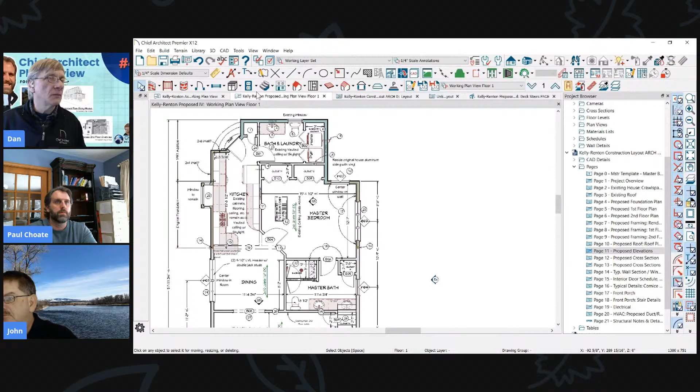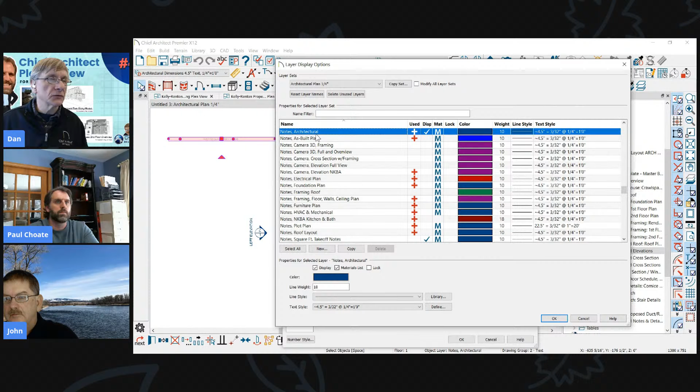Anything that's added to your plan automatically - window labels, cabinet labels, room labels, note schedules, any schedule - is controlled in that the size of the font in that schedule is controlled by what layer it's on. So this note schedule is controlled by this layer, which I've got set up to have 4.5 inch tall text in it, which is the size text you want for that kind of plan that's going to be printed at a quarter inch scale.

So you'll notice if I switch to a different scale, that schedule will change in size, because for a 1/8-inch view, I need bigger text. So it's controlled by the layer that it's on.

So when I start adding notes to my plan with the note tool and type things in, I know that text is going to be the right size. So if I switch to a different size plan, I've got it set up so it automatically changes for that particular kind of view.

And it's controlled in the layers for anything that has to do with it. If you type in the word 'label,' all of the labels are controlled by whatever's listed right here.

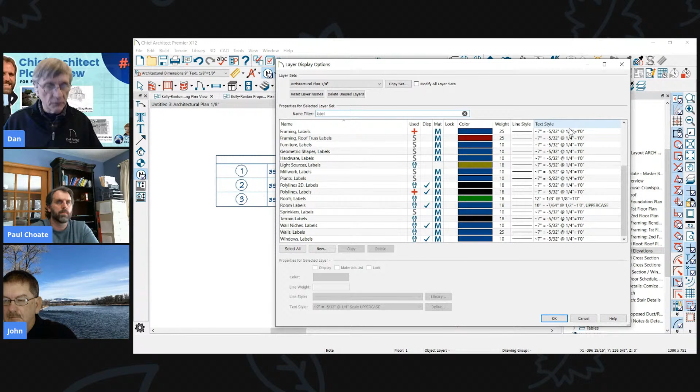If you go to the schedules, all of the schedules are controlled by whatever's listed here. Actually, I think I have the schedules under notes in my template, so all of the note schedules are controlled by what's here and what size view you're on.

So I've got it all set up already, so it's all the right size text. It's really confusing at first, believe me. It took me a while to figure that out.

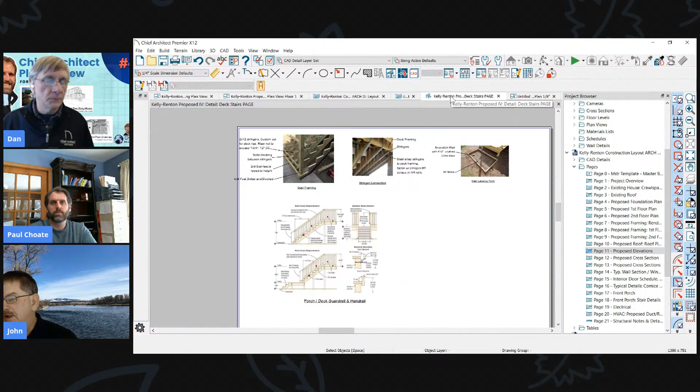Our second question is, if you print a layout to PDF, will it print differently? Yeah, what do you mean by that? I'm not sure. Okay, well, one thing you could do a couple ways.

So here's the actual layout page. When I click on the line weight button, sometimes that'll help you see how it's going to print out. When you turn the line weights on, if you've got CAD details here, you can kind of see how it'll look. Actually those are images, Dan.

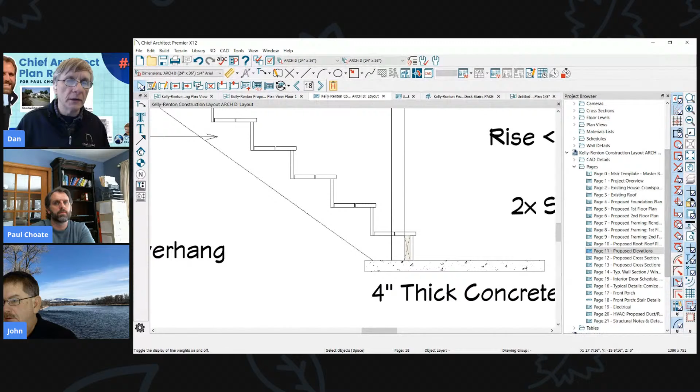All right, so let's go find a detail, a different detail. Yeah, let's find something like this that's a drawing. All right, so when I turn the line weight on, you can see a little bit better how it's going to print. It appears that particular view is all right.

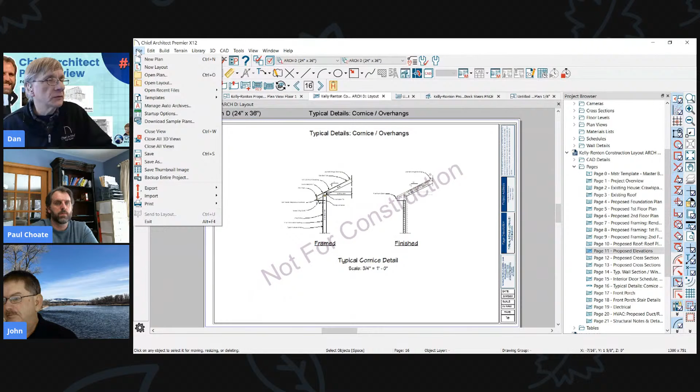Probably the gist of the question is, if you use print to PDF, is it going to print differently than if you just go straight to print? Possibly. I always tell people print to PDF and then print the PDF, because when you print the PDF, it will show you exactly how the print's going to come out.

The CAD screen might not. So again, if you print the PDF—I'm not going to do this because it'll take a while, unless I just do the current sheet. Let's do that, update, and that wouldn't take quite as long.

Let's cancel this. Dan, if you go on one of my cross section drawings, double click it, and hit the line weights, you'll see a big difference. All right, let's go there. Okay, so let me find one, one of those cross sections.

All right, the shadows are turned on, that's why it's dark. I think I already converted that to a plot line. Yep, so here's with the line weight off, and here's with the line weight on.

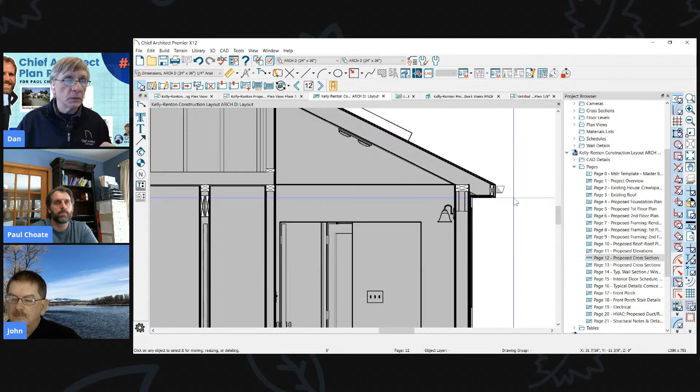Now, you can control this without having to go back to the view. If your line weights are printing way too heavy or way too light for your entire plan, you go to File, Print, Drawing Sheet Setup, and you're going to adjust the setting called Advanced Line Weight.

So if we put a real high number, like 300 millimeters, click OK, you'll see the lines become a lot lighter. So if you want it darker, go to File, Print, Drawing Sheet Setup, and under Advanced Line Weight, adjust it.

This is going to affect all of the lines in the program. So sometimes if you have a 24 by 36 that you're going to shrink down to 8.5 by 11 and print it, do this first, so your line weights become better on the 8.5 by 11.

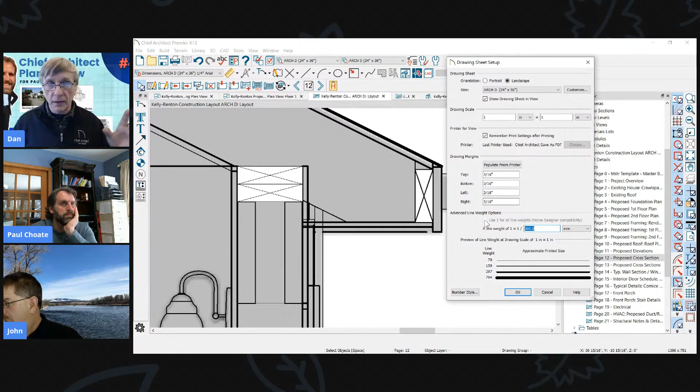So if I go to a 50 on this, you'll see my line weights mush into one big line weight. So that's your advanced line weight option, just go play with that a little bit. It's not going to affect your photos or renderings, just the lines. Okay, makes sense.

All right, John, I think we've set a record for going over on our show. Yeah, but that's typical when we start talking about Chief Architect stuff.

We could probably go another couple hours, no problem. There were comments saying, let's do this again. Okay, I think we will. We do this every Friday from noon to one. This format, reviewing somebody's plan, I want to make this a monthly deal. It's really a lot of fun doing this. I enjoy looking at plans and what other people are doing, or even our own plans. It's a good topic and a lot can be learned.

So Paul, when you sent me this earlier, was it last week or this week? I looked at it and said, this is an awesome plan, Paul, let's do a plan review. And thank you for volunteering, or agreeing to do this. Thank you for allowing us to do this goofy image of you.

A lot of people got a good laugh out of that. I give these to my graphics people and say, here, do something. They do all of my show images and this is what they came up with, and I thought it was cute as heck. I figured you'd get a chuckle out of it, knowing you as you've been to our live training classes, which I can't wait to get back to.